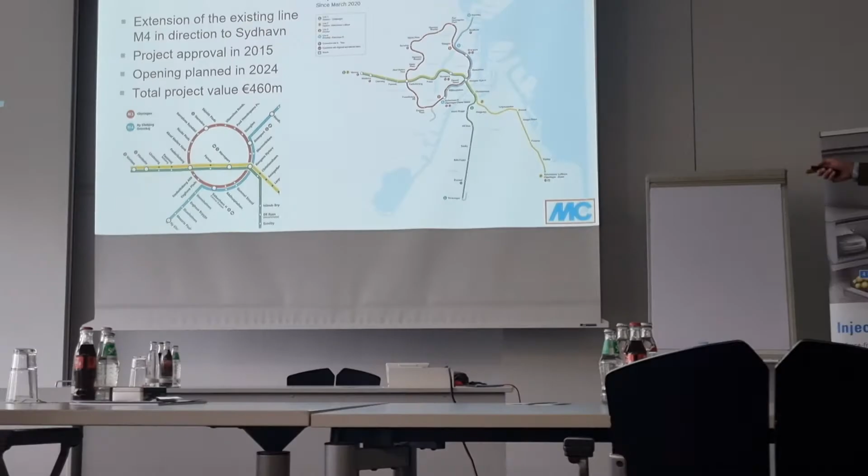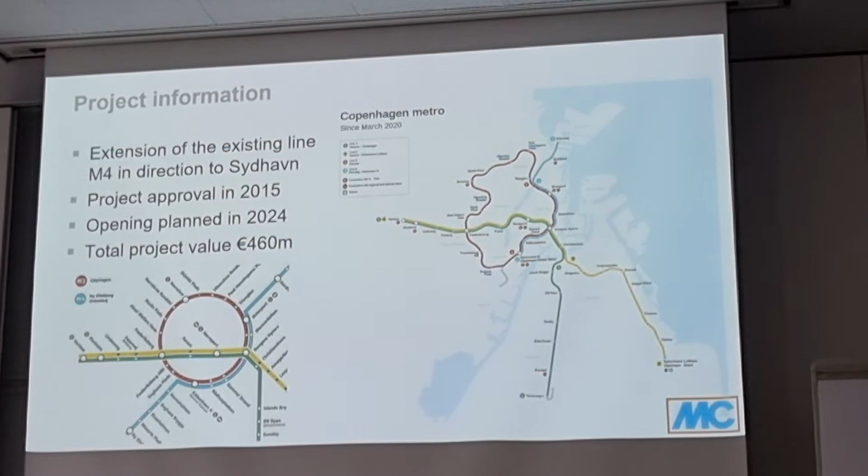And you have here some pictures of the already existing metro line in Copenhagen. So the project is taking place in the city of Copenhagen. The internal city of Copenhagen has something like 600,000 inhabitants, but the main area of Copenhagen is much bigger. There you have more than 1 million people living here. And what is called City Ring, of course you can see here is this red circle here.

But there are some additions already realized to this project, and the extension of the M4 is shown here below. So to the already existing metro line, there was an addition of 5 stations that you can see here below. And the total project value was estimated at the beginning at 460 million euro.

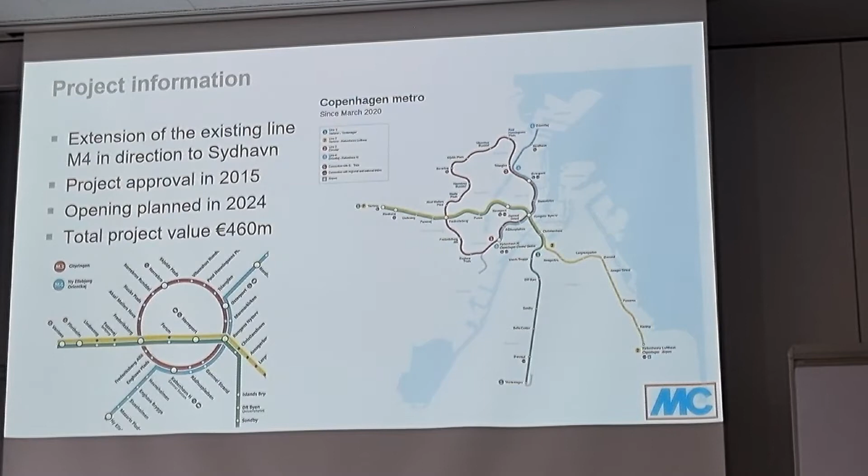Just some more project information. This project contains 4.4 km of underground line. It's a double line with 5 new stations. The internal diameter was realized with 2 TBMs that were running in both directions, with a diameter of nearly 5 meters.

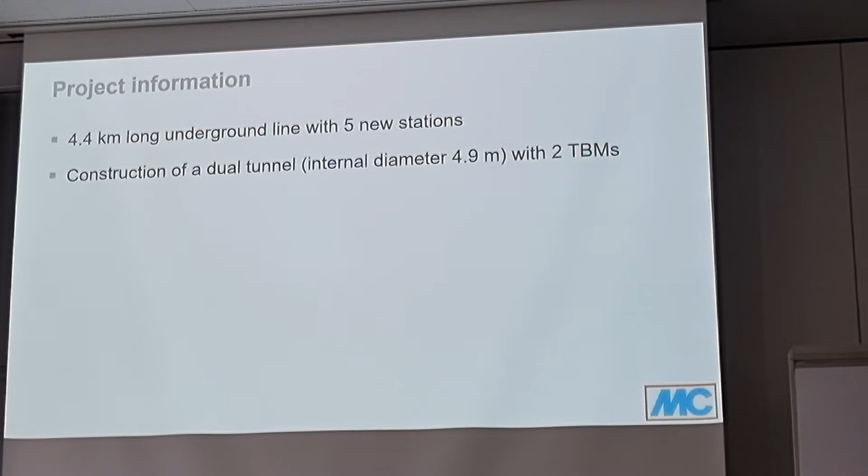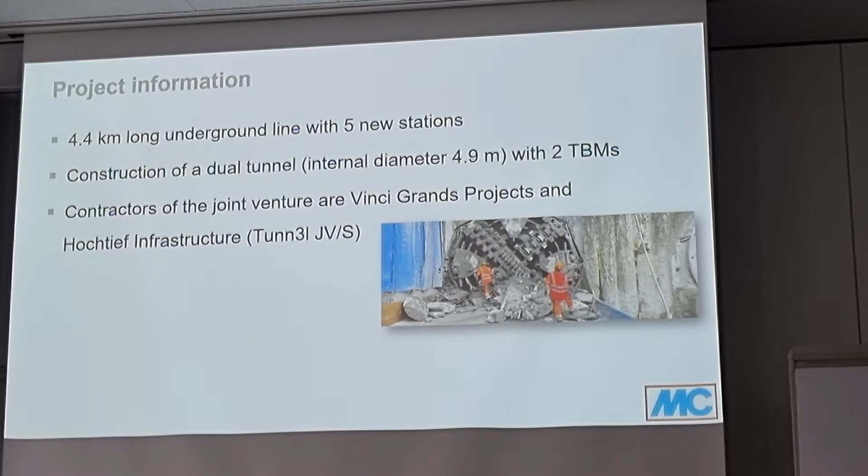The contractors of this joint venture were a German and a French company. We have Vinci Grands Projets, and the German Hochtief infrastructure, and they were combined in this joint venture Tunn3l, which was also our partner in this project here.

You have some impressions here from the job site with the TBMs. And the stations, of course, they are going to be special. So there was a tender also for the architects to come up here with special ideas for the realization of the project. This is really something where they lay a lot of stress on the art impact on the stations that are going to be realized.

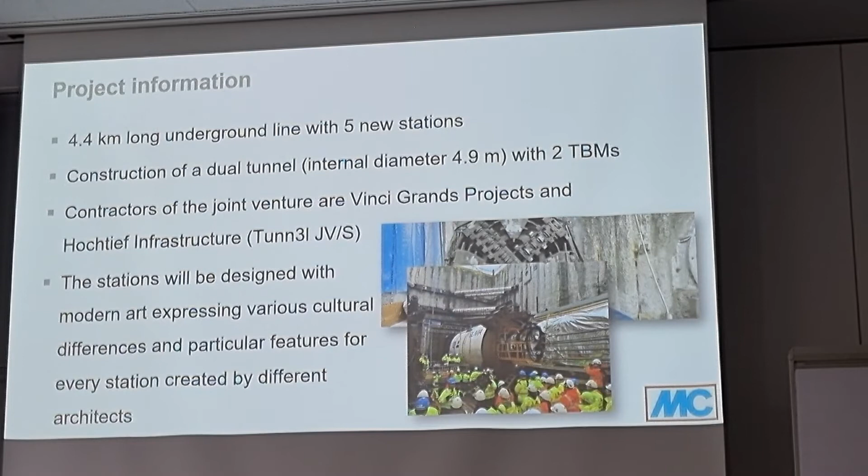But we are not yet in the phases of the stations. So far they have just finished the tunnel, and now they are going to lay more focus on the stations. This just gives you an impression of how one station will look like afterwards.

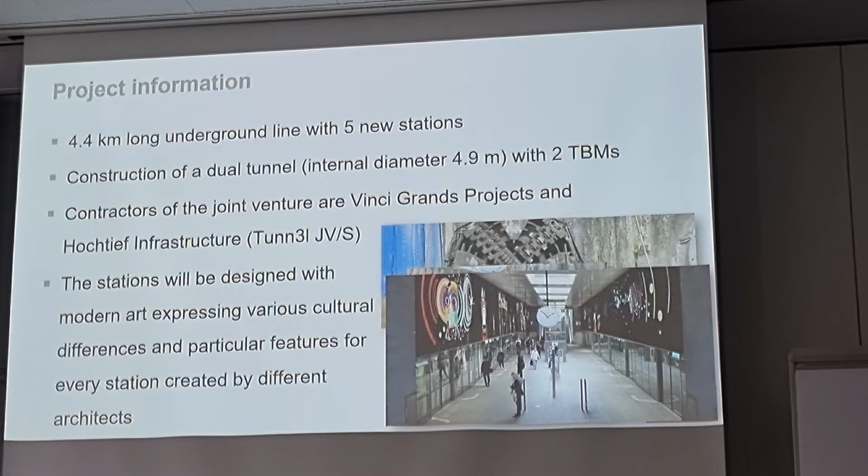Perhaps I should have mentioned that the station in the middle, that is called Enghave Brygge, that was a station where the TBMs were brought in and were also brought out. And all the drilling work was started from this station over there.

And of course we had some application challenges, I would say. The overall situation, not only in Copenhagen but in the majority of Denmark, is that you have a lot of limestone coming from the Ice Age. And of course, if you know Denmark in general, it is rather a flat country.

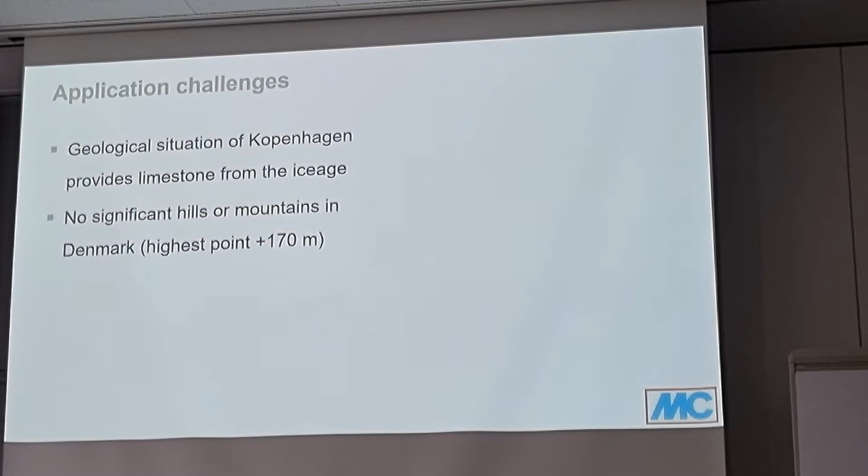So all the Dutch colleagues, of course, they also have a very flat country. But in comparison to Denmark, Denmark is even more flat than the Netherlands. So the highest point is not even 200 meters, which is, I would say, good for MC, because when you have a flat country, you have a lot of water. And it's also the situation here in Copenhagen, whenever you just dig a hole in Copenhagen, there's almost every time water. And all metro lines are below sea level.

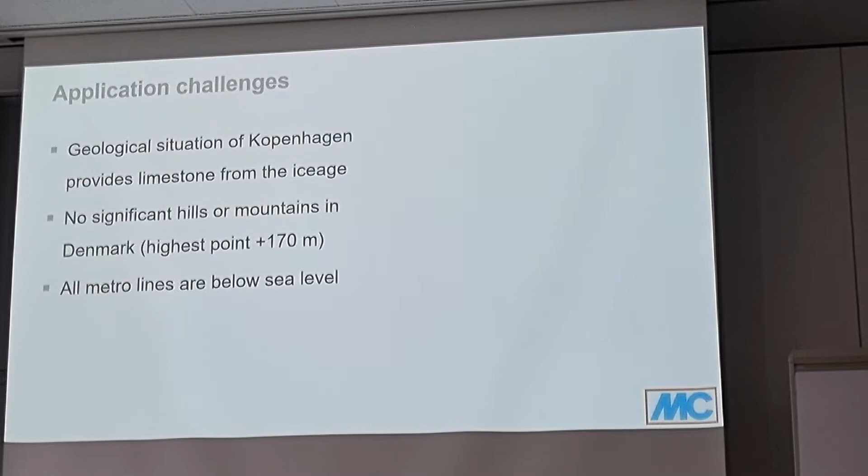So that just gives you an impression of the station that I was just mentioning here, the Enghave Brygge. You can see here this hole where the TBMs were brought in and also brought out. And it's surrounded here just by some part of harbor and of course the sea. So the water is present in every corner here. And of course also for the groundwater there was a strong demand for the maintenance of its current level and the treatment of the water.

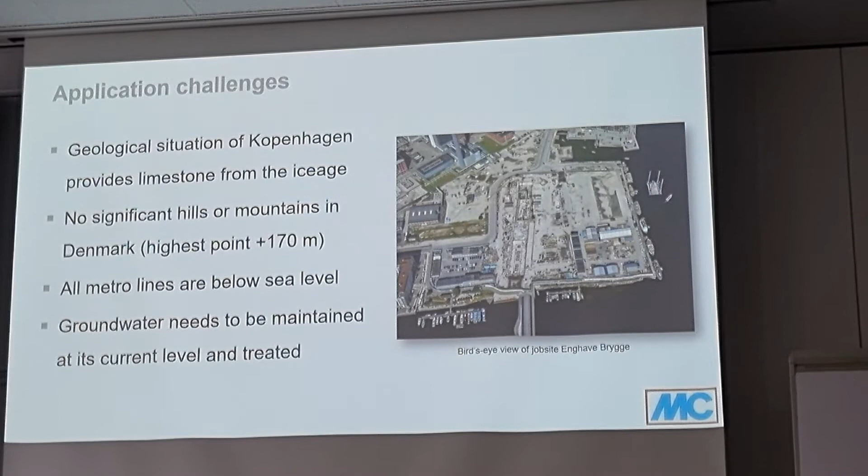In total, 5,700 concrete rings were placed for this tunnel project. These concrete rings had some sort of rubber connection, and very often these rubber connections did not work like they should. That's when we were brought in to do our injection here.

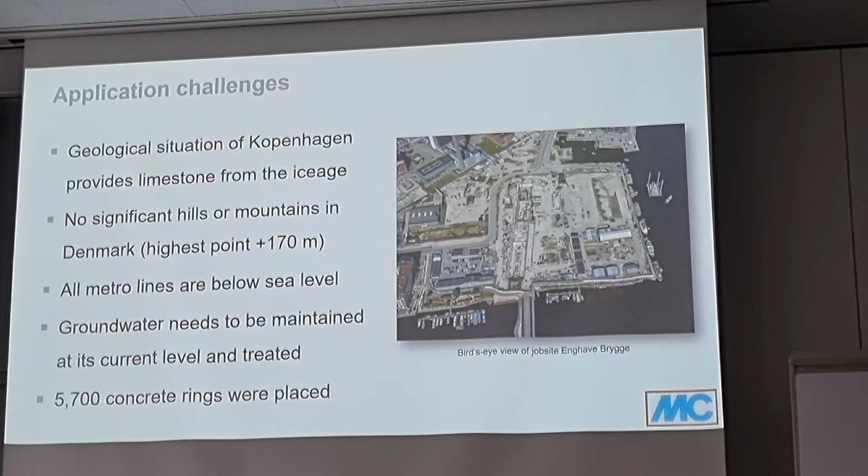As I already mentioned, the commercial challenge was a long-running process. The first contacts were made by our tunnel department, by Mr. Lars Landmark, in 2019, and initially he tried to bring in the tunnel products. There was no discussion at the beginning about injection - that came later. The preparation of documents took a long time.

There were a lot of documents to be filled in with all the demands and requests for this project, mostly run by Mr. Jörg Stank. There was a risk assessment later on in May with focus on tunneling products, as I already mentioned, and then later on we could see that the tunnel products were not taken into account, but then came the injection products.

Of course, there was also some process on the Danish side. All chemical products in Denmark need to be registered - you have to show what is inside the products, even the formulation, in this chemical database, which is a bit unusual for us. In former times it would have been nearly impossible, but nowadays we are able to do that. So it wasn't even a big question to register these products and forward the information to our partner. And then suddenly, as you might know, there was some small COVID-19 issue.

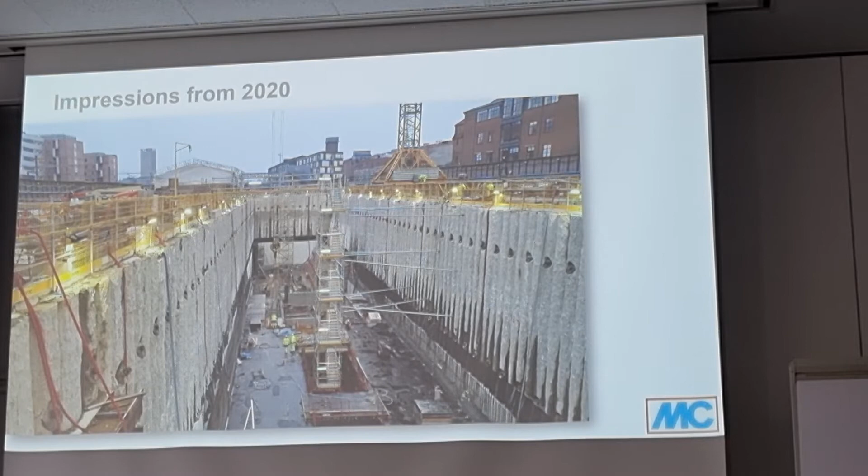This is also a big story, and of course it is a big project. Wherever we go to any customer or client in Denmark, we are speaking of this project. Even if it's not about injection, everybody knows this big job site, and it provides a very good and positive reputation for all our activities in the Nordic countries.

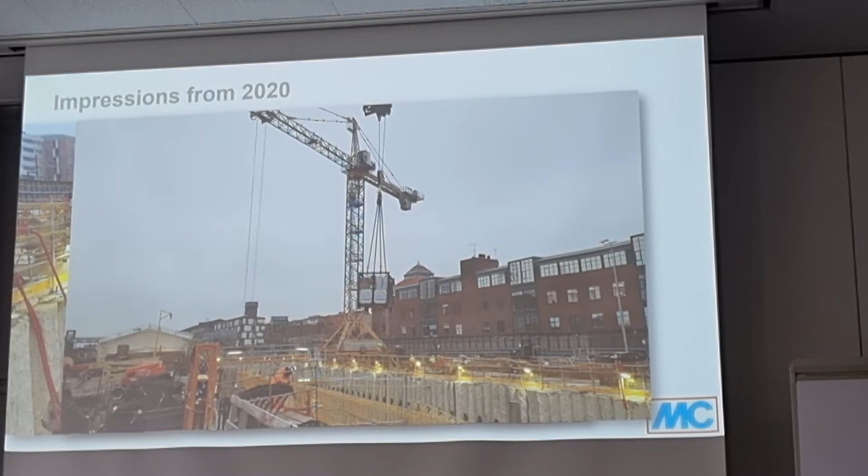Yeah, this is just an insight into the tunnel. You can get an impression of all the concrete rings that were placed here, and some impression of the training that was done by Markus and by Daniel in that case.

Do you have any addition to the training? What was your impression?

Yeah, maybe let's add that it was really well prepared, also by our tunneling team and the whole team from MC, including you too.

We came there, and usually, as everyone of you knows, when you come to a job site you plan 1 or 2 days extra because nothing will be prepared. But in this case, we came there, we parked our car - first of all, we were at the wrong job site or at the wrong project. Then we were taken to another one, and then everything started. Someone was waiting with the crane for us to put the material into the tunnel.

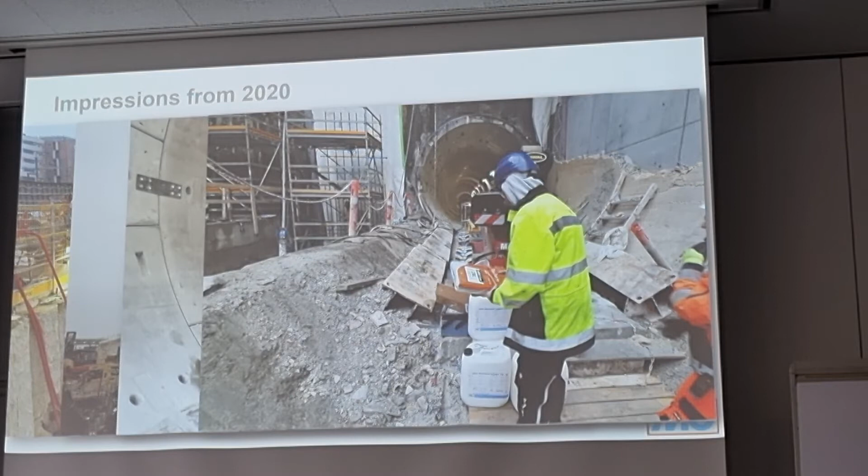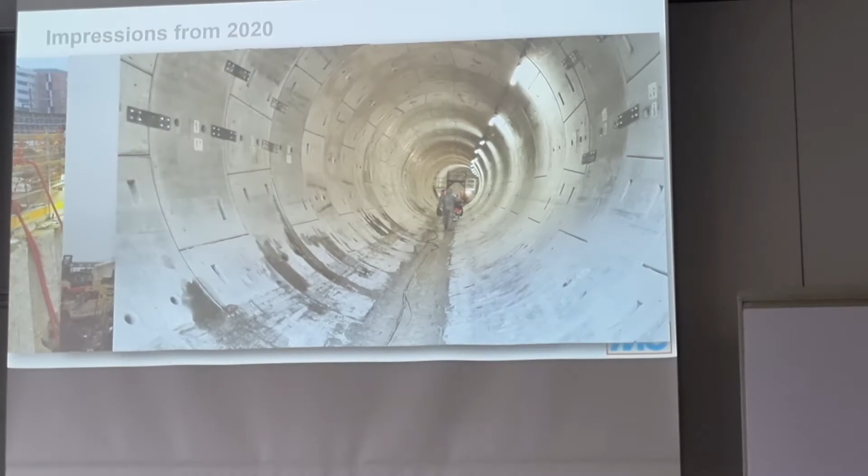Very interesting was that we said, okay, please choose the site where you want to inject and where you want to do the training. And the training looked more like Daniel and I were working while everyone was watching us. When we entered the tunnel, we knew why they did it - they chose the place where something was in the water. At the picture before, if you go one back, you see the guy walking there with completely sealed clothes, head cover on top, gloves and clothes. The groundwater at that spot was somehow contaminated with something, and you shouldn't get into contact with it. That was the area where we had to do the injection.

So we were covered, but it was winter time, so it was really warm. So you were already in contact with this Italian team? Yes.

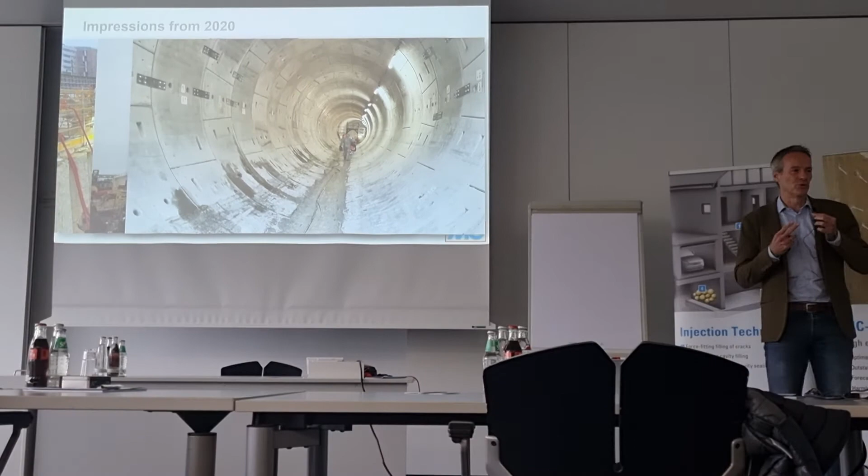The one you see there walking is one of the Italian guys. This is probably something we have to add - of course, it is a huge job site with a very international team. At this moment there are just 2 Danish people working in this organization. All the others are Italian. There was some English person, and also a German on the job site, which I realized after about 2 days. Then we managed to speak in German too. So a very international team, and therefore a very international impact on this project.

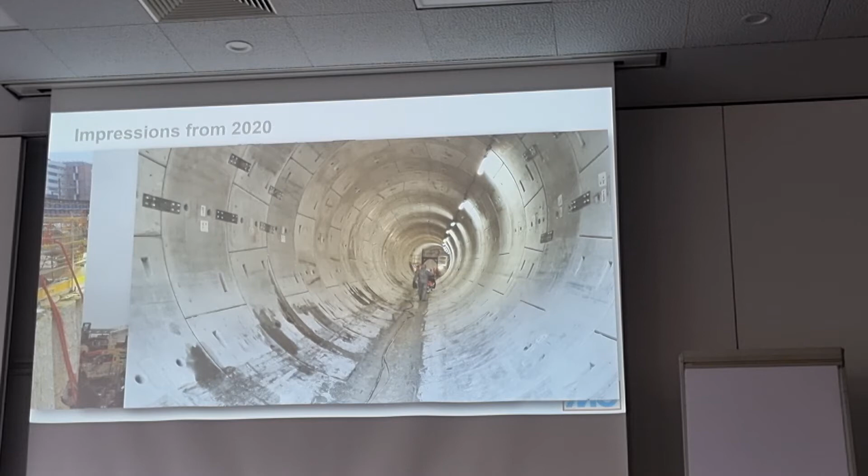Speaking of our competitors, I was just 2 weeks ago in contact once again with Webac. Webac was also present on this project, but I had the impression they simply lost track - they were no longer in contact, and during COVID-19, they simply disappeared. Markus and Daniel hired a van and went towards Denmark, unsure if anyone would block them at the border, but luckily no one did. So we managed to go there, and we were present all the time - even if not physical, but present all the time - not like Webac did.

So I would say it was not the persuading technical approach at this time here. We were simply more present and more reliable than other partners.

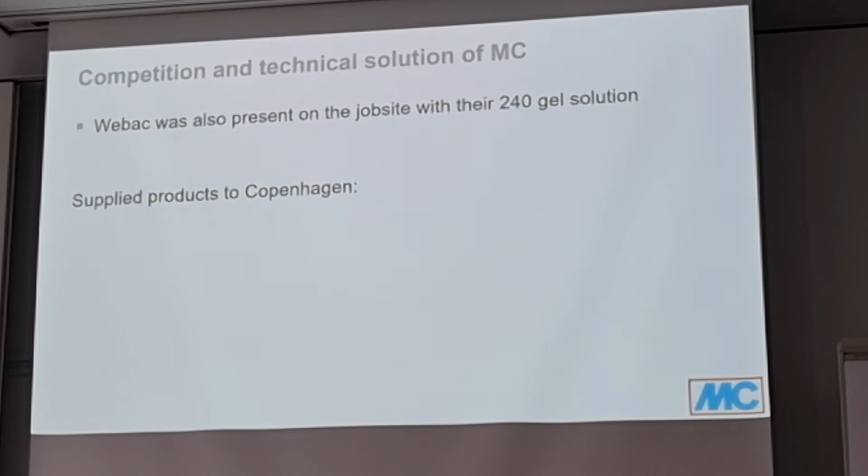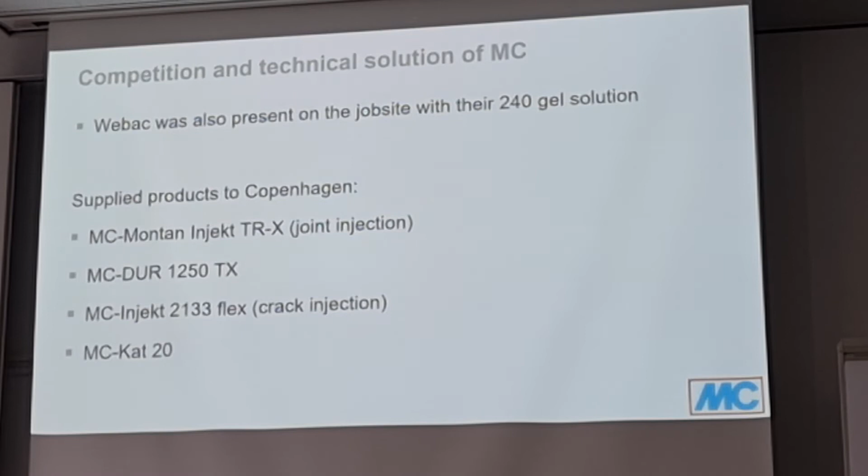The products we supplied to this job site were mostly our Montan Injekt, the TR-X, and a smaller amount of the 2133. Perhaps I have to add that this is a bit critical in Denmark, as all products containing isocyanate are really limited for usage there. The spray application of any isocyanate-containing product is completely forbidden - it's really strict. We also have a very small amount of the 1250 and also a very small amount of the Kat. The total turnover so far is more than 700,000 euro.

We're going to take the next order - so 750,000 euro, I would say, in total. A very nice project, very easily running, I would say.

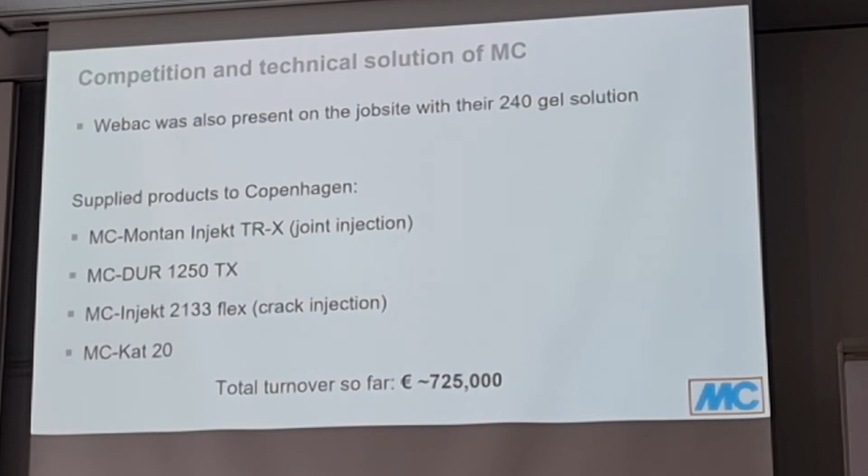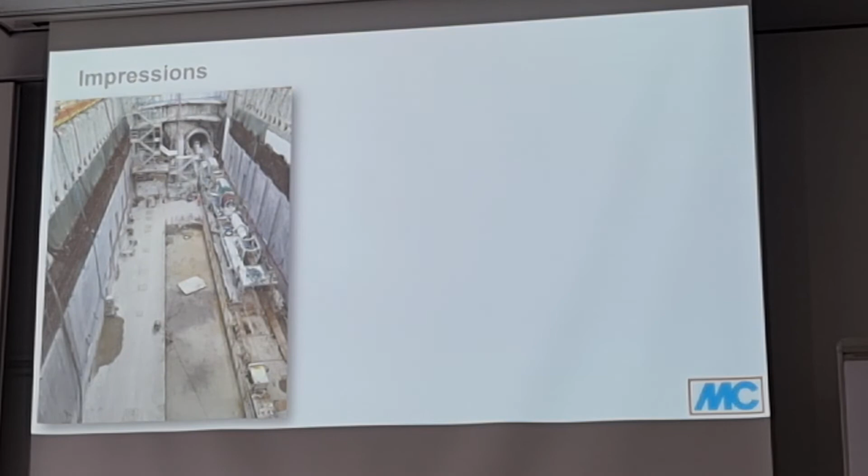And here are some more impressions that I took afterwards. You can see this a bit later on, it looks more coordinated, it looks properly done. There are still leakages inside, and just to give you an idea of what we did here - mostly we had leakages between the elements. There are just some small cracks, like the one you can see here, also done with our product.

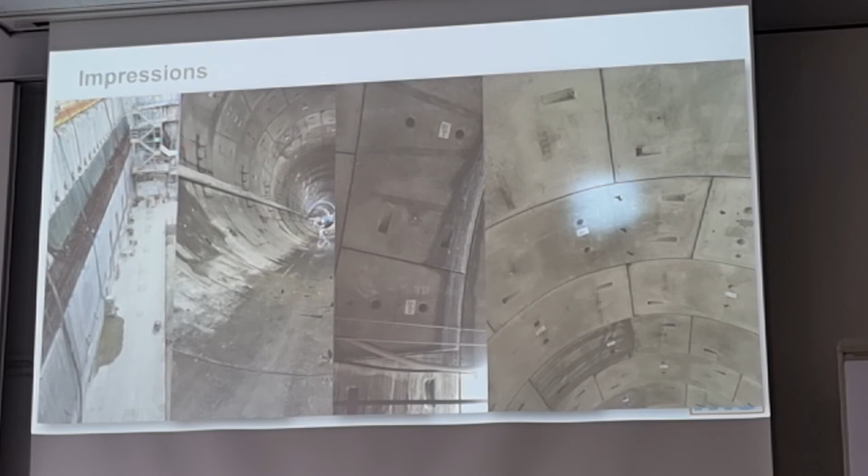This is of course the nice thing about this project - our products are laying everywhere. The empty buckets are used for all the rubbish on the job site. If you work for MC, it is really fabulous to see our buckets lying at every place you can imagine. It's really a very nice issue and a very nice project.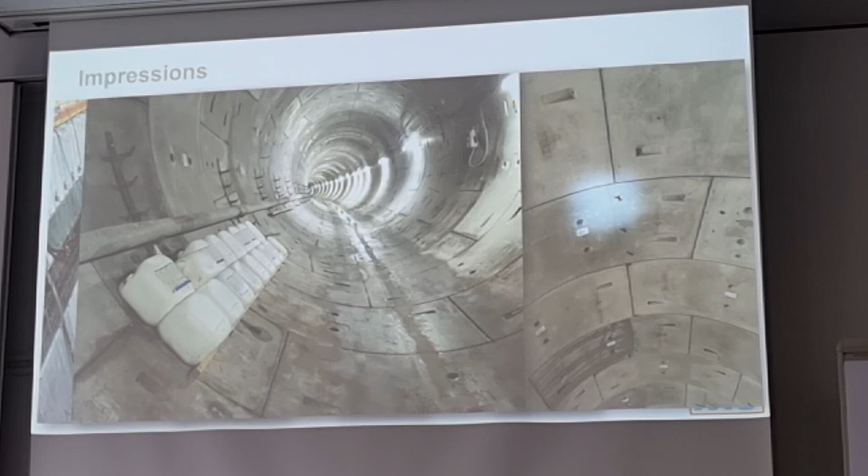And right now they are starting to do more and more work here at the station. They also did some injection in the station where they also had some leakages and used our products. So we thought they had already finished all the tunnel area, but no, they also did some injection in the station area.

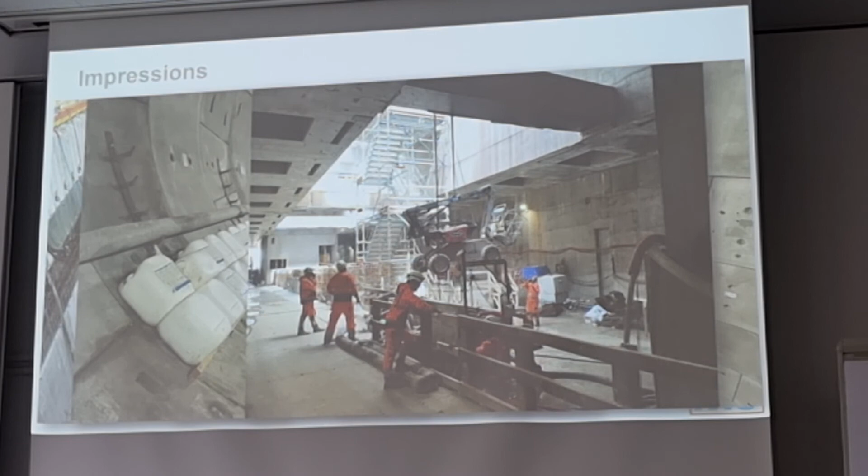For the outlook, as I already mentioned, whenever we can, we speak about this project in the Nordic countries - everybody knows it. There are a couple of other big infrastructure and tunneling projects right now happening in the Nordic countries.

We use LinkedIn very often as a marketing tool in the Nordic countries, and LinkedIn is very popular. I don't know if it's the same in your countries, but everybody in the Nordic countries is present on LinkedIn - even a person working in a stock is present, so you can really access everybody.

So therefore we started at the beginning of this year our presence on LinkedIn with the account of MC Bauchemie Nordic. You can see we don't have too many followers at this moment, as we've just started all the activities.

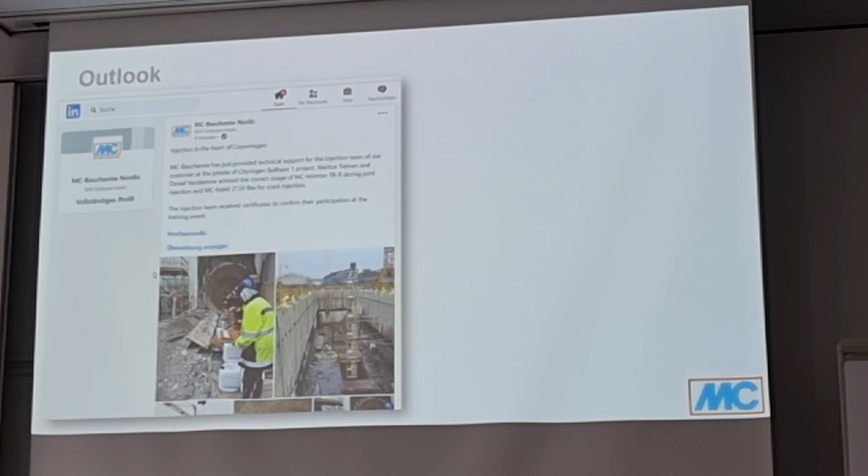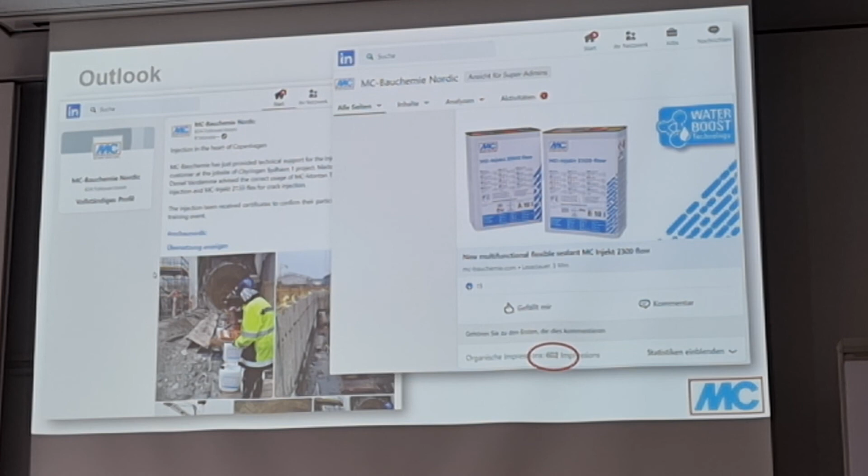Usually we don't have too many organic impressions, so whenever we publish information - I copied here one piece of information we did on the flow - you can see we created something like 400 impressions on this news. That was completely different when we published the information on the injection, combined with the pictures from Akkus that we've already seen - that created nearly 7,000 impressions.

So that had really a huge impact, this project. The attention from the people having a look at this project was much more intense than for all the other news we published.

Okay, any questions from your side?

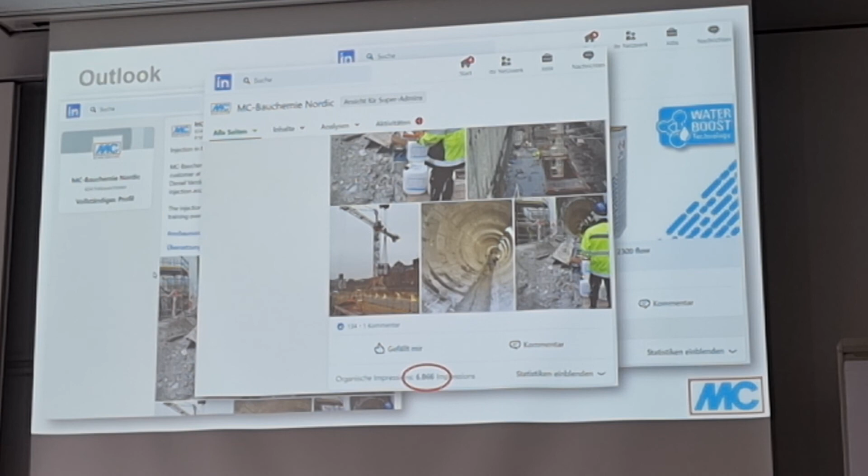Let me say full marks. It shows what one can really achieve if one has got the proper and professional...